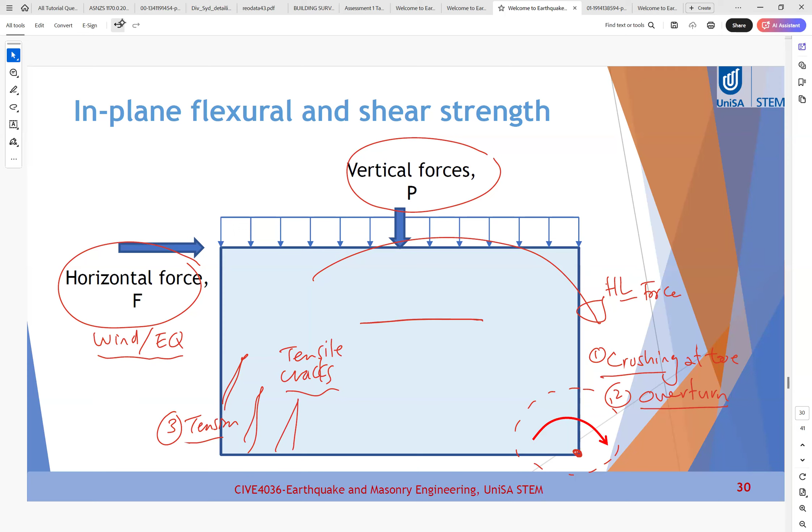This force also can cause sliding shear here. So this is the force issue - these are the things we need to check when we design the unreinforced masonry wall for in-plane flexural or shear strength. Let's continue at the last step we reached last week.

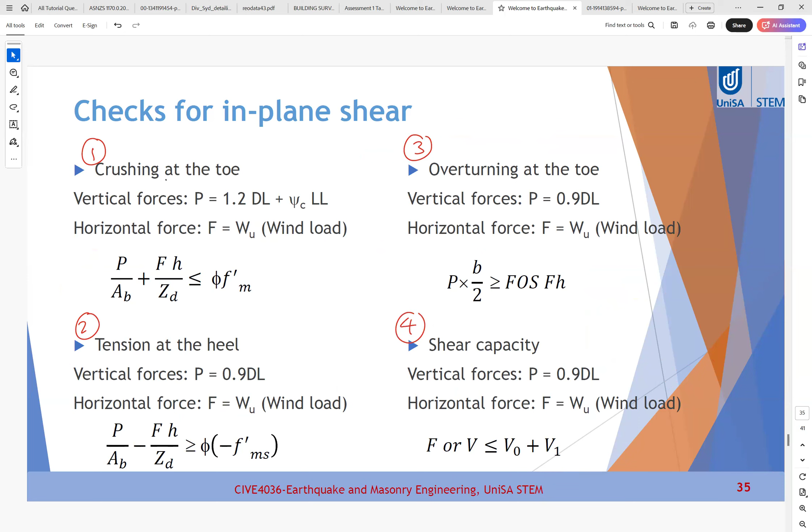This was a summary of the issues or checks needed, and today we will go through them in detail. Our first check is crushing at the toe. So when you have the horizontal force F here - from wind load or earthquake load - and P from vertical loads, gravitational load, dead load, and live load.

First, the load combination to check the wall for crushing: for vertical loads P, we have 1.2 dead load or G plus psi C Q. For the horizontal force combination F, it is directly the wind load, because the wind load is already an ultimate load, so it's already factored.

Again, the problem is we may have crushing due to compression on this side of the wall due to the applied moment from horizontal force. The formula we use is P, the vertical force, over AB, the bedding area of the masonry element, plus F, the horizontal load, times H. H is the lever arm, or the height of the wall.

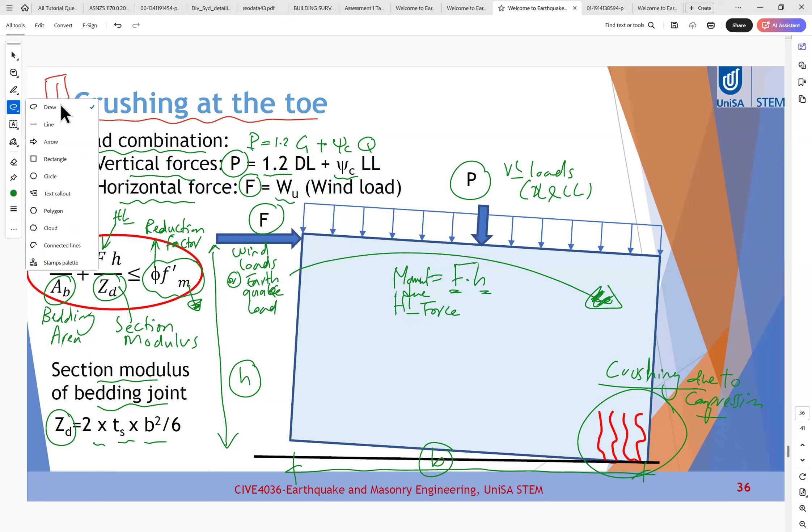So what we need to know here is the load combination and the formula. The load combination: 1.2 dead load plus psi c live load for vertical forces, and for horizontal forces we have the wind load or earthquake load. The formula: P over AB plus F times H over Zd, the section modulus, should be less than or equal to phi Fm dash.

Our next check for unreinforced masonry wall is tension at the heel, also due to the moment on the wall. So we have F, H, and P here, and the moment will cause tension on this side of the wall, so we can also have cracks - this is tension at the heel.

For unreinforced masonry, because it is weak in tension, we need to be careful when designing this type of wall and check for any possibility of tension. The load combination for this case: for vertical load, only consider the stabilizing load, P equal to 0.9 G. For horizontal load, F equals W ultimate or E - earthquake or wind load - directly.

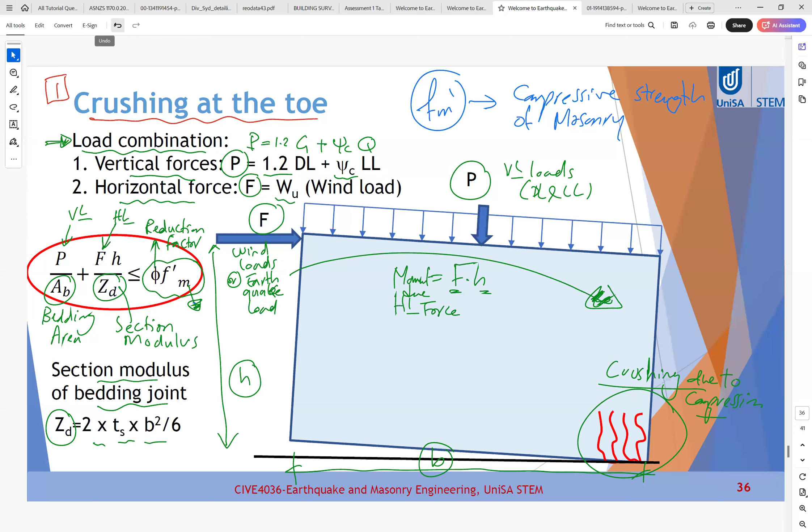Of masonry. Okay, so this is Fm dash, and here is FMS dash.

The third issue we need to check for unreinforced masonry walls under in-plane loading. So we have the overturning at the toe here at this point. So due to the force, the horizontal force and the lever arm h, so we will have a moment applied here, M equal to F H.

This moment may cause our unreinforced masonry wall to overturn like that.

Okay, so this is our F. So we need to check that our wall is stable against this overturning.

So the load combination in this case, we have for vertical forces P equal to 0.9 dead load or 0.9 G. For the horizontal force F, again, it is F equal to WU or the wind load.

So this is similar to the tension at heel. So in this case, the overturning moment is F times H. So this is our overturning moment.

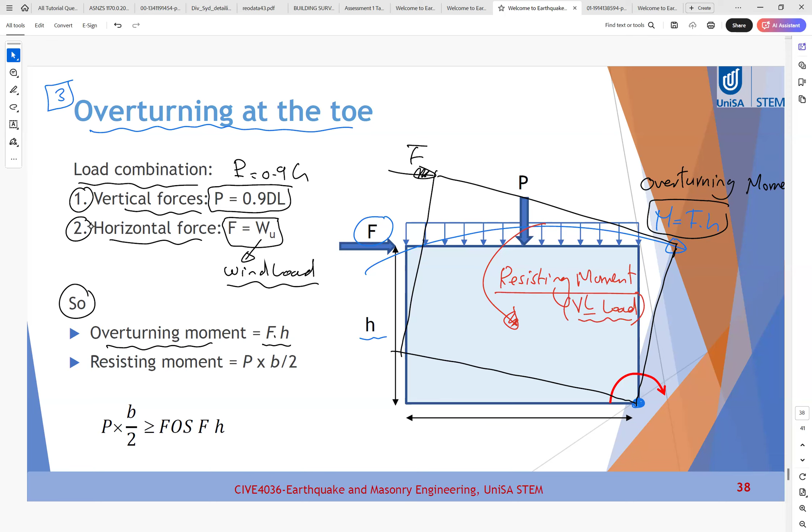Generated or produced by the vertical load. Okay, this moment will be, if this is our wall width.

So this force acting at a distance of B over 2 from this point. So our resisting moment will be the vertical force P times half of the wall width, which is B over 2.

Okay, so the resisting moment is P times B over 2, and the overturning moment is FH.

So our formula for stability, or our check formula, is the stabilizing moment or the resisting moment, P times B over 2, should be more than or equal to a factor of safety times the overturning moment FH.

So we have, this is our resisting moment.

And this is our overturning moment.

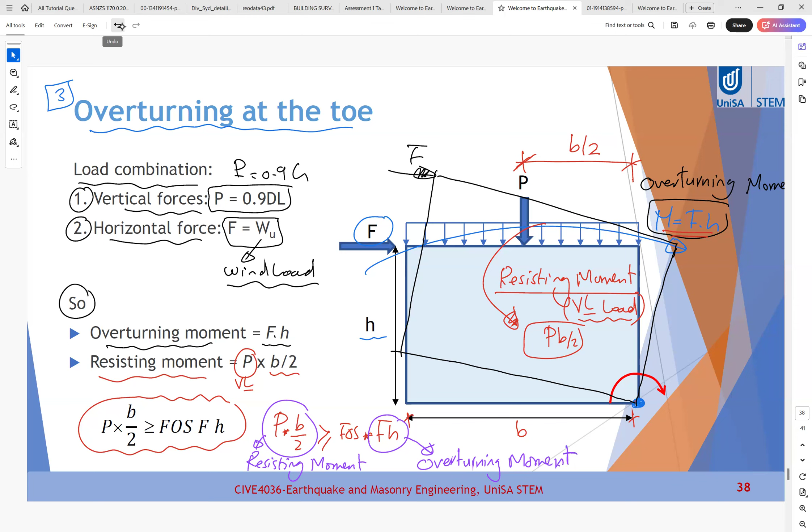Okay, so our check means that we need to confirm that the resisting moment is more than the overturning moment.

Our fourth check for these walls is shear capacity of the wall, in clause 7.5.4 in AS 3700, 2018 version. So we have two types of shear stress.

We have sliding shear failure, or sliding failure.

Okay, this is when we have something like shear stresses at this point. So the wall slides at this red surface, the sliding surface.

Okay, another type of shear failure is the diagonal shear failure. So diagonal shear failure is something like that. We have this crack. Okay, this crack can be within, as you know, we have some bricks.

So this can be within the bricks. Okay, so we have shear crack, diagonal shear crack, like that.

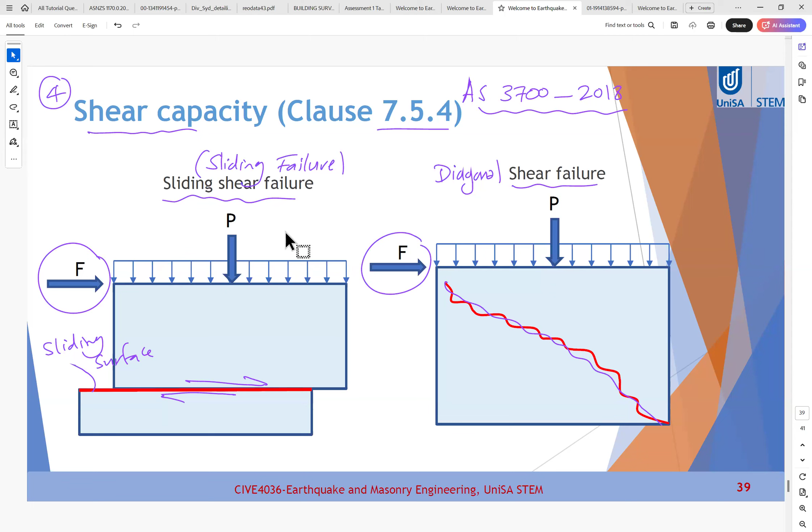So these are two types of shear failure due to the in-plane lateral force or in-plane lateral loads.

Okay, to check the horizontal shear forces, we have two types of shear forces, the horizontal shear force and the vertical shear force. So for horizontal shear forces, our formula is in clause 7.5.4.1.

The formula is V design should be less than or equal to two components, V naught plus V1. So the shear capacity of the wall comes from two components.

The first component is V naught, which is the shear bond strength of the section. The second component is V1, which is the shear friction strength of the section.

So the shear capacity comes from shear bond strength, the bond between the wall, the masonry, and the mortar, and so on. And the other is the friction, or shear friction.

Okay, so V naught equal to phi FMS dash AD. So this is our V naught value. And V1 value is KV times FD times AD. So phi is the...

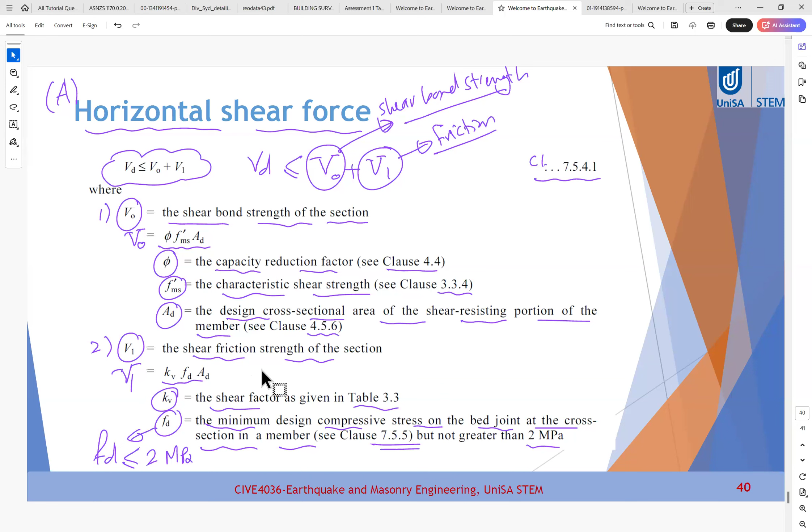Depending on clauses 4.4, 3.3.4, and 4.5.6, we can find V naught, the shear bond strength, or the shear friction, which equals KV FD AD. KV is the shear factor given in table 3.3. FD is the minimum design compressive stress on the bed joint at the cross section in a member from clause 7.5.5, but not greater than 2 MPa. So FD has a limit, should be less than or equal to 2 MPa. After you find these two components, VD should be less than these two components added together. So this is for the horizontal shear force.

For the vertical shear force, VD should be less than or equal to phi FMS dash times AD. As you can see, FD here is similar to V naught. So VD here should be compared to the same formula as V naught. We can say this value is V naught, or the shear bond strength of the member. VD's parameters are phi, the capacity reduction factor from clause 4.4, and FMS dash, the characteristic shear strength from clause 3.3.4. AD is the design cross-sectional area from clause 4.5.6. So it's a similar formula to the part of the horizontal shear force.

And that's it for the unreinforced masonry. Do you have any question, guys?

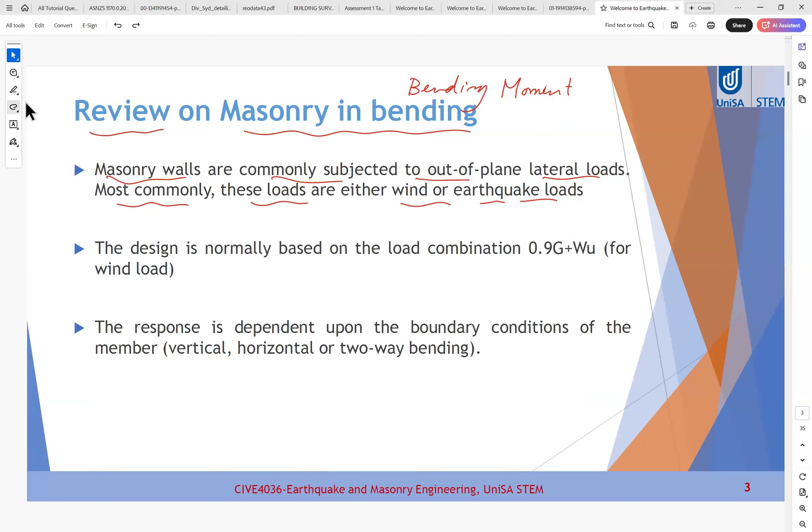Masonry walls are commonly subjected to out-of-plane lateral loads. Most commonly, these loads are either wind or earthquake loads. So if this is our wall, the wall is subjected to out-of-plane lateral load or lateral force from wind or earthquakes. The design is normally based on the load combination 0.9 G plus WU for wind load.

So our main load combination is 0.9 G plus WU, this for out of plane and in plane.

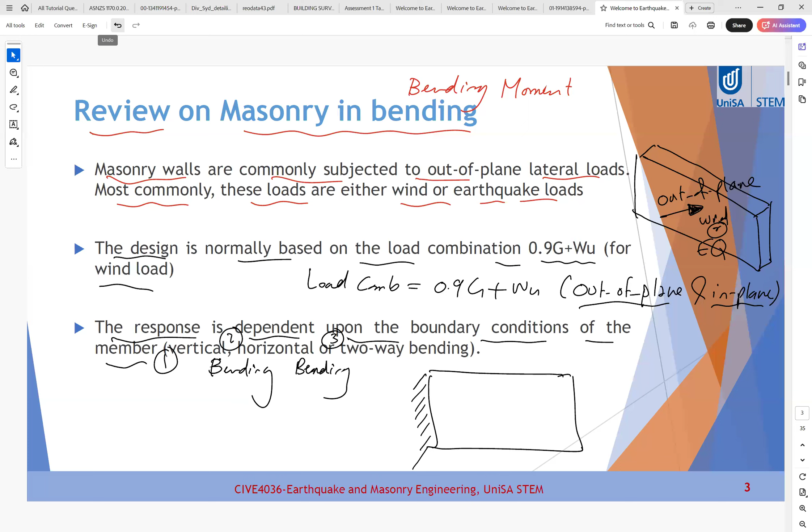The response is dependent upon the boundary condition of the member: vertical moment or vertical bending, horizontal bending, or two-way bending. So we have three types of bending, if you refer back to last week's lecture. Depending on the boundary condition of the wall, we might have boundary conditions on the vertical sides, and also boundary conditions for the horizontal or the top and bottom edges. So we have top edge, bottom edge, and vertical side, vertical side. Depending on the boundary conditions of these four edges, the behavior of the wall will be decided.

For example, we might have our first bending case as vertical bending for this type of wall. As you can see, we have the top edge restrained using this red boundary condition, and also the bottom edge is restrained - bottom edge restrained as well. This means that the sides are free and free here. So what happened to the wall? This wall bent in the vertical direction like that.

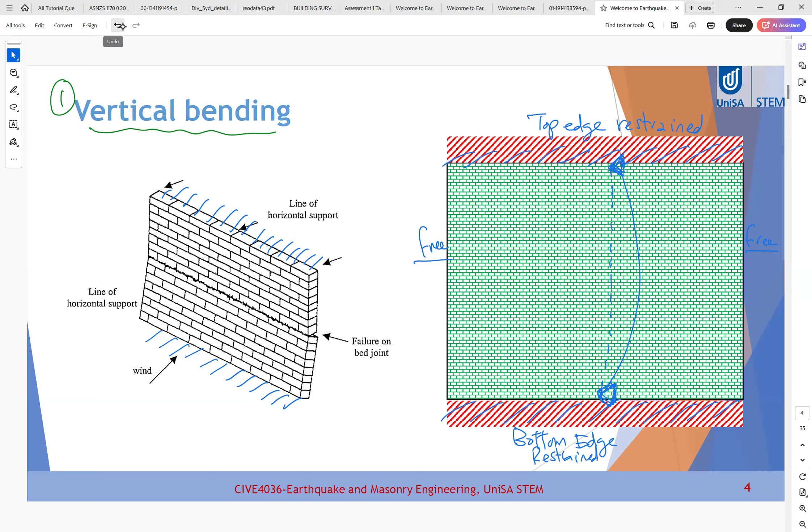So this is our original wall. This one will bend like that because we have support at the top and support at the bottom. If we look at this one here, we have support at the top here, support at the bottom line here. So the wall bends in this direction like that, causing cracks in this joint here in the middle, because this is the point of maximum bending. And the failure here happens on the bed joint.

So this is called vertical bending of the masonry walls.

The second bending behavior is horizontal bending, which is quite similar but in the other direction. If we have a wall like this, it's restrained at only the two vertical sides, so we have vertical restraint here and vertical restraint here, with no restraint at the top or bottom. In this case, the wall will bend in the horizontal direction because we have a support here and a support here, so the bending will be in this direction, and the cracks will happen like that.

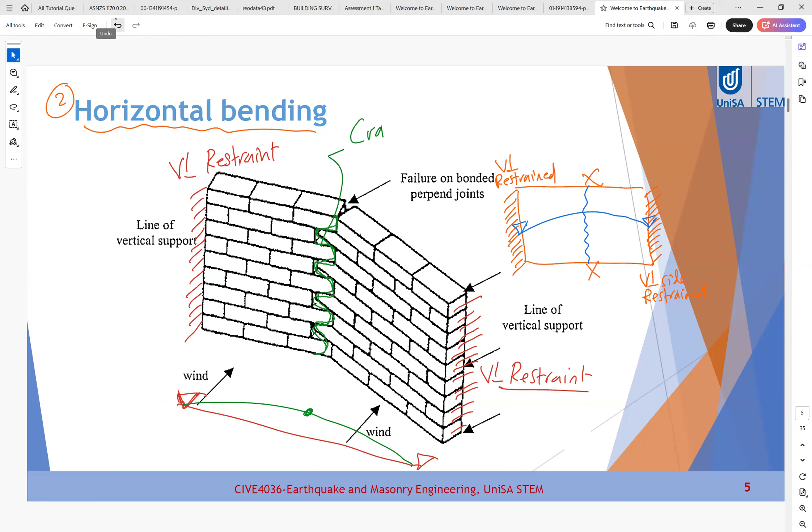So if we look here, we have a line of support here, vertical restraint, and another line of support here, vertical restraint. So this is our system, and our bending will be something like that. The maximum moment here, so as you can see, the cracks happen like that. So this is our crack or failure at the perpend joints, which are the vertical joints of the wall.

This is just a reminder of the one-way horizontal bending. The horizontal bending may fail either through the mortar joints, or partly through the joints and partly through the masonry units. So as you can see here, this failure line can happen in the masonry unit itself, or part in the masonry unit and part in the joint.

All perpends must be completely filled. The wall must comprise a minimum of four continuous courses of masonry acting together in horizontal bending. So each line is one course: 1, 2, 3, 4. So this is the requirement.

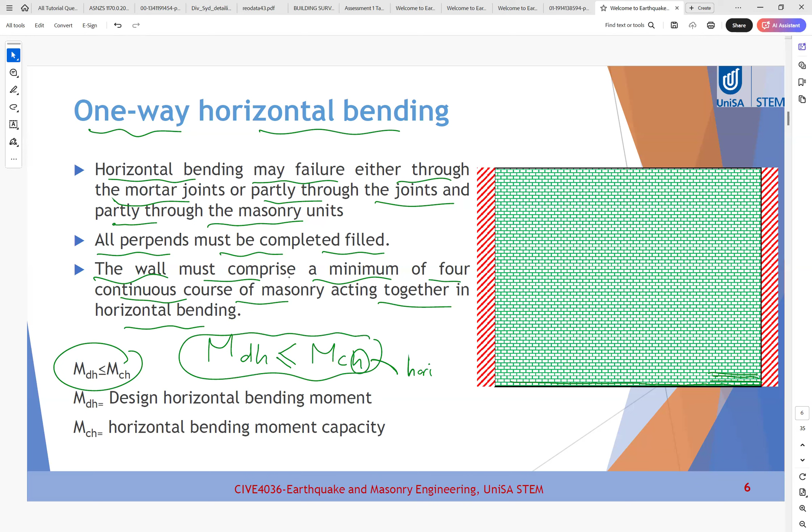The design formula is MDH should be less than or equal to MCH. H is for horizontal bending. MD is the design moment, so the design horizontal bending moment, and MC is the moment capacity. So similar to any design formula, the design moment should be less than or equal to the capacity.

Thank you, Hassan, for the question. The column is a vertical restraint only if there is a connection between the column and the wall. They need to embed some connection between the column and the wall. But if it is just attached to it without any embedded connection, it is not considered a vertical restraint because it will be too weak.

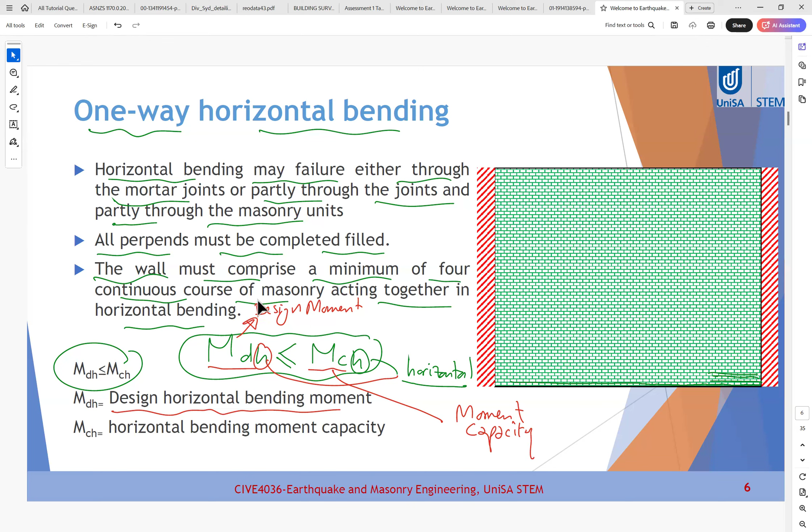So this was just a revision of what we have done last week for the one-way horizontal bending and one-way vertical bending. The third type of bending behavior is the design for two-way bending.

The actual crack pattern is similar to slabs or concrete slab. It depends on the support or restraint condition on each side of the wall panel. We have four sides: top, bottom, and vertical side left and right. For two-way bending, you might at least have one restraint at the bottom and one restraint at one of the vertical sides, so one horizontal restraint and one vertical restraint.

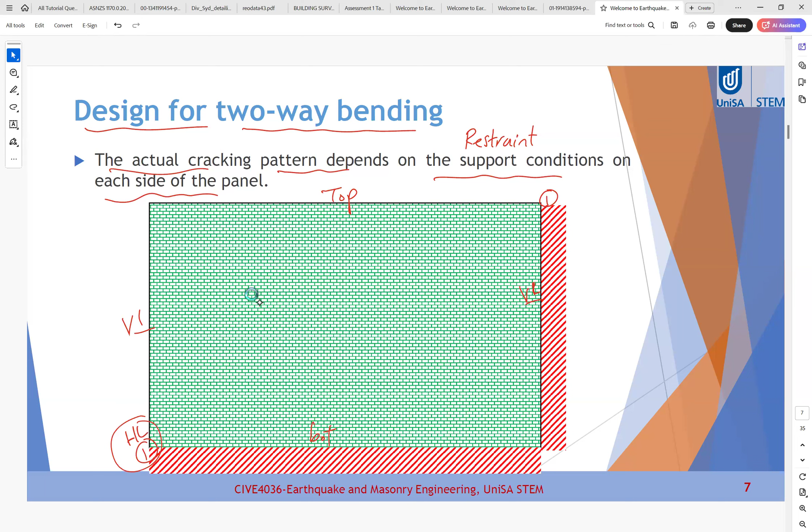So as you can see here, this is an example of two-way bending. In this case, this side of the wall is supported by another wall, so we have a line here. We have also a support at the bottom side of the wall, and a line of support at the top of the wall. So only the right vertical side doesn't have restraint.

So as you can see, we might have a crack line or fold here at 45 degrees, for example, and also here, because we have two lines of support, these will intersect at this point. Then the crack will continue like that until it reaches the free point, because there is no support here, so it will end there. So this is the crack shape, quite similar to the cracking lines for slabs, depending on how much support there is.

So for example, if you have four supports like that, we will have 45 degrees, 45 degrees, and here 45 degrees, 45 degrees. So this will be our cracking or two-way bending behavior of the wall.

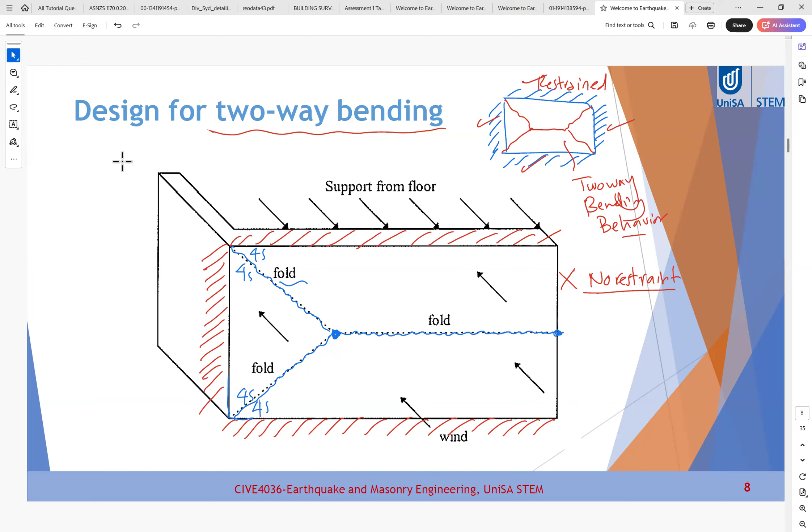If you have four restraint conditions - this is a reminder from last week's lecture. Briefly, the design steps for two-way bending are: the wall is designed as a rectangular panel with lateral support at least along its base and one of its vertical edges. So we need to design the wall to act in two-way bending behavior. It should at least have its bottom side restrained and one of the vertical sides restrained - restraint here, no restraint here, no restraint here.

This is the minimum. The wall is of a single leaf or solid construction, or of cavity wall construction, with each leaf of the cavity wall being a single leaf or solid construction. So we might have a single leaf wall - this is the cross section. Or we might have a space here and two leaves, for example. So this is single leaf, and this is cavity wall.

The requirements for robustness are satisfied for this type of masonry wall. The construction and detailing of the wall are such that the requirements of clauses 7.4.2 and 7.4.3 are satisfied. So all these are some conditions for the design of two-way bending.

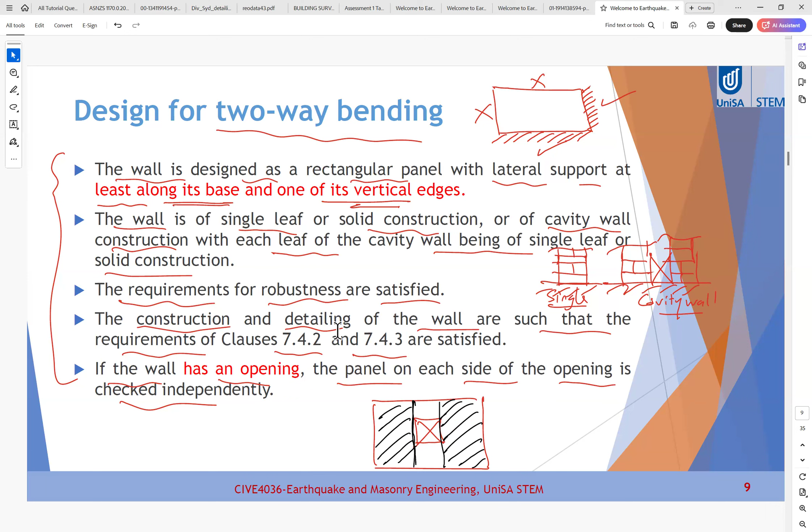So this was all a reminder or revision of what we covered last week. And now we can start the introduction to reinforced masonry.

The general requirements for reinforced masonry are that reinforced masonry is designed for four types of straining action: design of member in compression, number one; design of reinforced masonry member in bending, number two; design of members for in-plane shear, number three; design of member for out-of-plane shear, number four. So the reinforced masonry wall needs to be designed for four straining actions: compression, bending, in-plane shear, and out-of-plane shear.

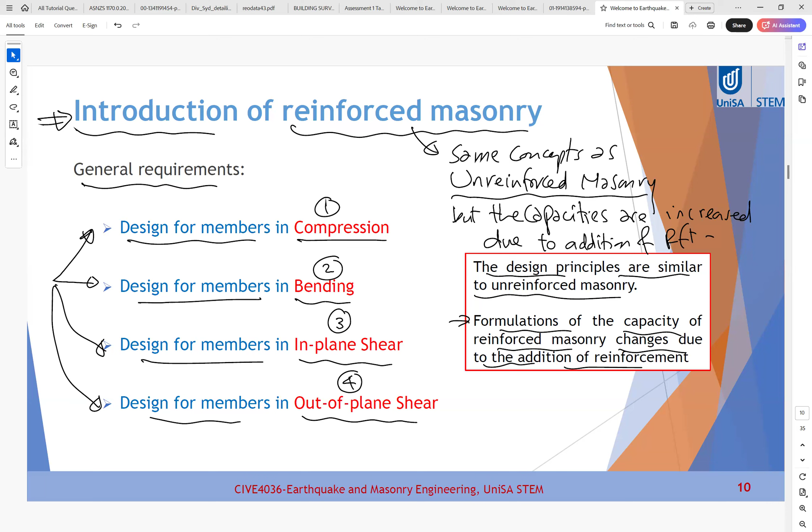The design principles are similar to unreinforced masonry, but the formulation of the capacity of the reinforced masonry increases due to addition of reinforcement. So the main idea is the same concept as unreinforced masonry, but the capacity is increased due to reinforcement. This is logical because we are adding reinforcement to enhance the behavior of the unreinforced masonry. So let's see what reinforced masonry is, or how we can reinforce the masonry wall to become a reinforced masonry wall.

This could be obtained by reinforcing the masonry wall with cores of blocks - within the core of blocks we have vertical bars. This is our first step. Then around the bars, we fill it with grout. So this is how we reinforce masonry walls - we add some bars with spacing between these bars, then the vertical bars are surrounded with grout to be fixed in place.

So now this wall becomes reinforced with vertical reinforcement first, as you can see in this figure. We add, for example, bar here, bar here, bar here, then fill around the bar with some grout, some grout, some grout. The spacing between bars is the bar spacing. So this is the first reinforcement, vertical reinforcement.

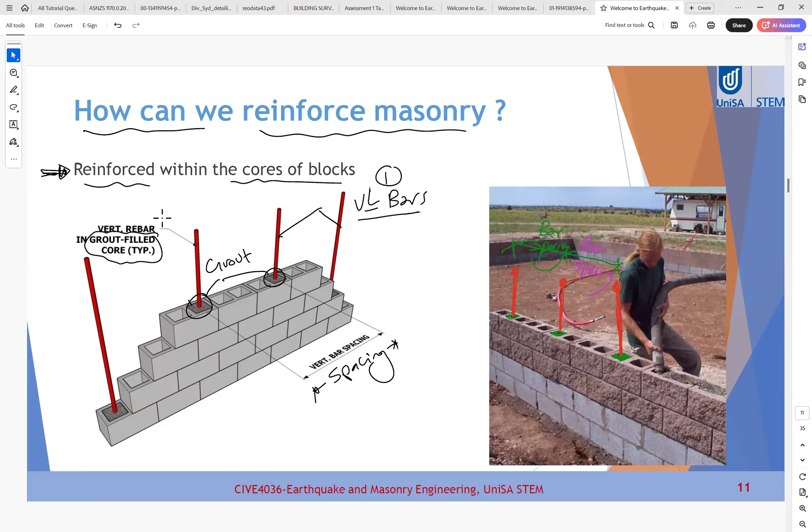We will also have reinforcement in the bed, or in the mortar bed or mortar course - in other words, horizontal reinforcement. So how can we reinforce the masonry wall? Using two types of reinforcement: one is vertical reinforcement, and second is horizontal reinforcement.

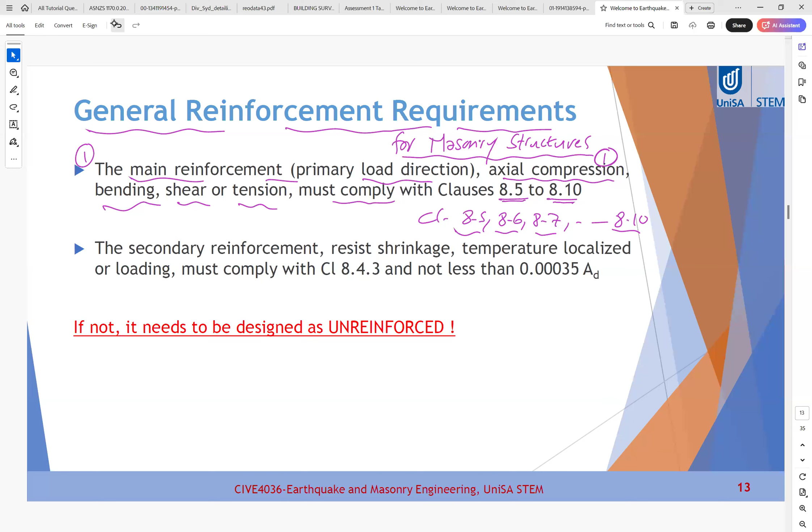There are some general reinforcement requirements for masonry structures. The first is the main reinforcement for primary load direction - axial compression, bending, shear, and tension must comply with clauses 8.5 to 8.10. So any main reinforcement of the reinforced masonry wall should comply with clauses 8.5, 8.6, 8.7 up to 8.10 for all design actions, which are axial compression, bending, shear, or tension. So you need to check this reinforcement against all these clauses.

The secondary reinforcement, which resists shrinkage, temperature, localized effects, or loading, must comply with clause 8.4.3 and must not be less than 0.00035 AD. So the secondary reinforcement needs to be checked against clause 8.4.3, and the secondary reinforcement should be more than or equal to 0.00035 times the design area of the reinforced masonry member.

And the use of secondary reinforcement to resist shrinkage, temperature localized issue, or temperature loading. So these are the benefits of using secondary reinforcement, if these two conditions, A and B, are satisfied.

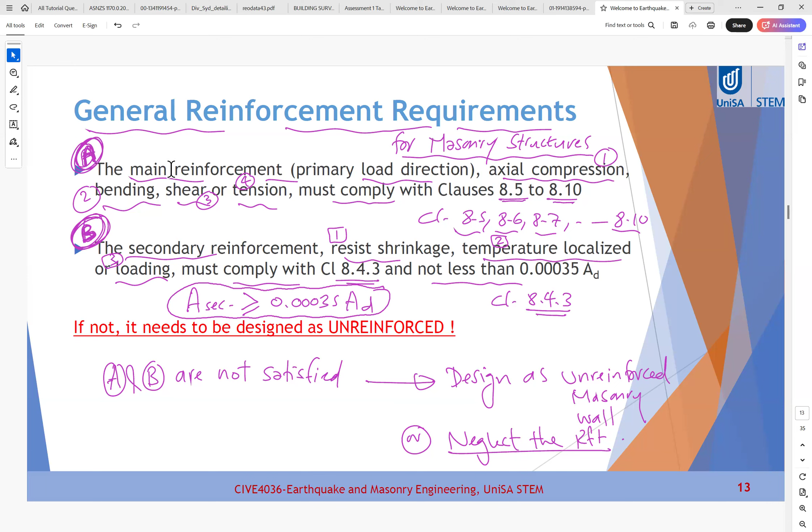If these two conditions, A and B, are not satisfied, design the wall as an unreinforced masonry wall. In other words, neglect the reinforcement inside, meaning the added reinforcement can be ignored.

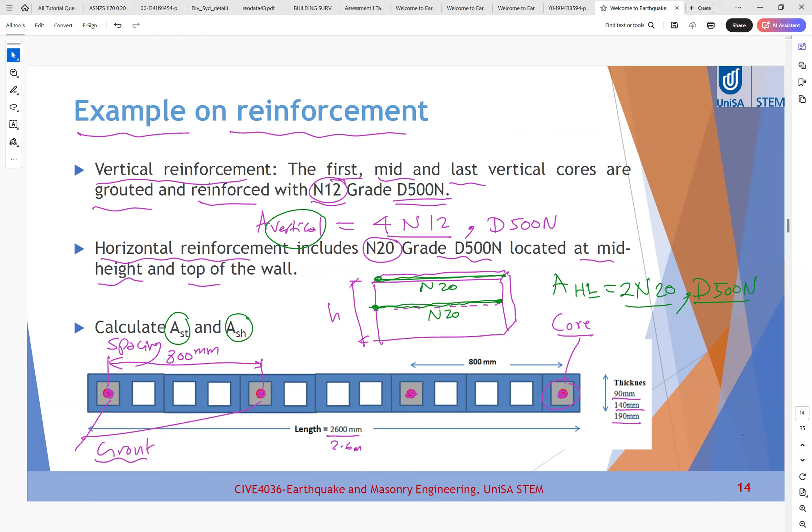The first one is vertical, 4N12, and the horizontal reinforcement is 2N20, both with the same grade, D500N. The requirement is simple: just know how to calculate area S vertical and area S horizontal. So vertical reinforcement, as we know, 4N12, so 1, 2, 3, 4 bars, each N12, with spacing of 800 millimeter.

So the total area of the vertical reinforcement will be the area of 4 bars, so it's 4 times pi R squared. Each bar is a circle, so it has a diameter and also a radius R. Area of a circle equals pi R squared if using the radius, or pi D squared over 4 if using the diameter. For N12, the radius is 6 millimeter, so pi times 4 times 6 squared gives us an area of 452.4.

For horizontal reinforcement, similar, we have 2 bars in N20. So if this is our wall, we have 1 bar at the mid height here in N20 and 1 bar at the top in N20, so total is 2N20. So area horizontal is again 2 times pi R squared. The diameter here is N20, so the radius is half, which is 10 millimeter. So the total area of the horizontal reinforcement is 628.3.

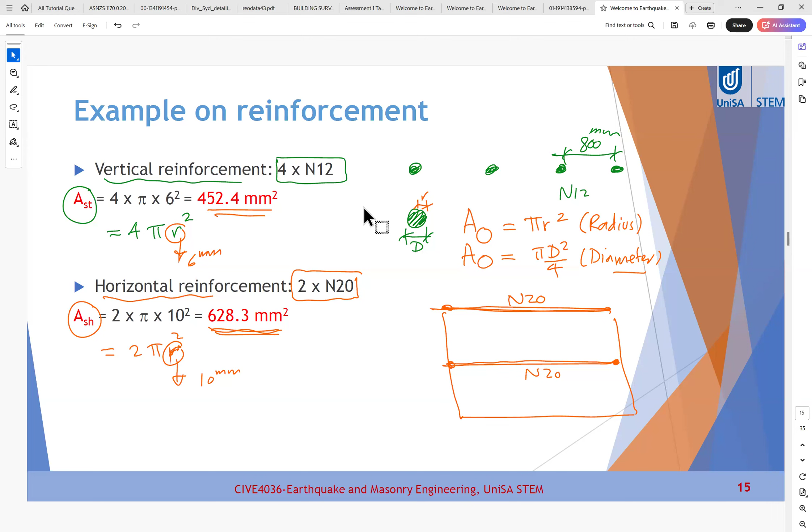Then our first formula or our first design action is the design of a reinforced masonry member in compression according to... okay, no worries, Harrison.

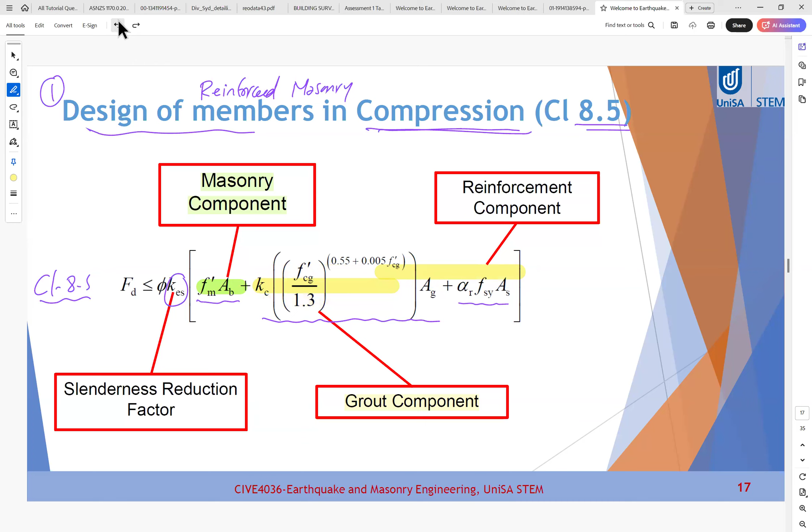The third component, which is for the reinforcement component, is alpha R Fs yield As. So this is our third component. And Kes is the slenderness reduction factor for the wall.

So these are the parameters of the design of reinforced masonry walls in compression. We have a contribution of three elements in the compression. The first contribution is from the masonry component itself and from the reinforcement embedded inside, and due to the grout surrounding the vertical bars.

So these are the slenderness reduction factors - sorry, these are the equations for reinforced masonry in compression. And let's have a look in the standard about that. Let's have a quick look.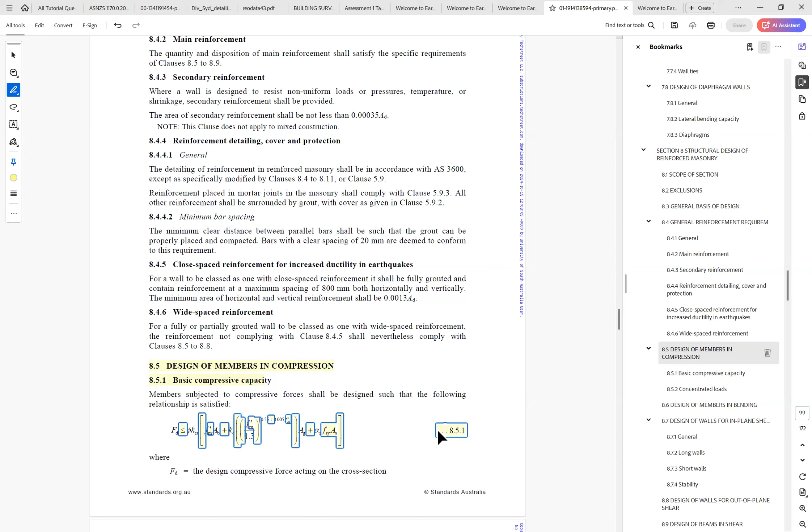So here, as you can see, this is the design of member in compression here. Clause 8.1 and 8.5, sorry. So 8.5.1 is the basic compressive capacity, according to clause 8.5.1, as follows.

So this is the formula. The design parameters of this formula are, as you can see: FD is the design compressive force acting on the cross section. Phi is the capacity reduction factor. KES is a reduction factor to account for the eccentricity in loading and slenderness of the member in design of reinforced masonry, and KES is given using this formula here.

SR is the slenderness ratio. E is the effective eccentricity. Fm' is the characteristic compressive strength of the masonry. AB is the bedded area of the masonry cross section. Kc is a strength factor for grout in compression, 1.4 or 1.2 based on masonry type.

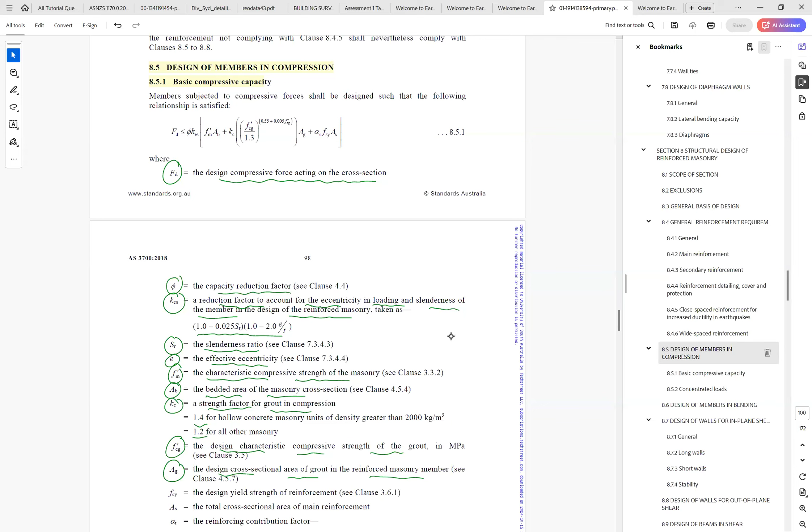Fcg' is the design characteristic compressive strength of the grout in MPa. AG is area of grout, the design cross sectional area of the grout in reinforced masonry member. Fs yield is the design yield strength of reinforcement. As is the total cross sectional area of the main reinforcement. Alpha R is the reinforcing contribution factor: 1 for piers, 0.4 for walls, 0 for concentrated loads.

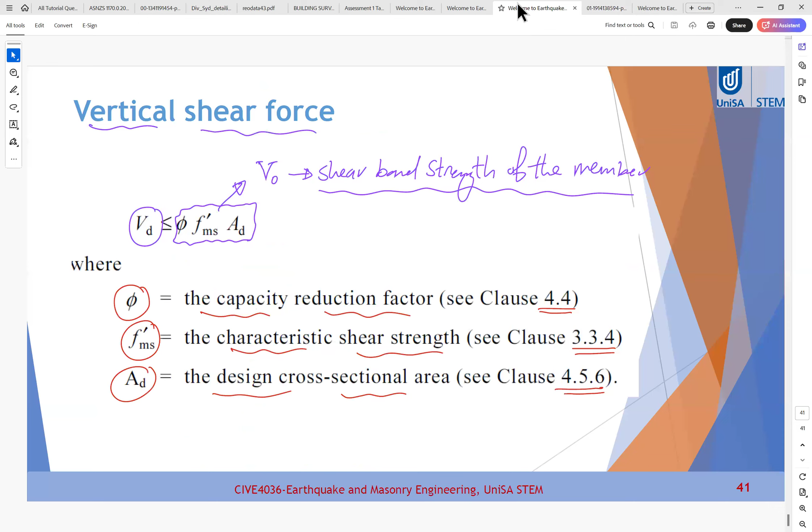So these are a brief introduction of the formula we are using for compression design, and the parameters are defined clearly in the standard. Calculation of the slenderness ratio SR is identical to that required for the refined calculation procedure in 7.3.4.3. So SR will be according to clause

7.3.4.3. The reduction factor KES is equal to 1 minus 0.025 times SR, multiplied by 1 minus 2 times E over T. So this is our reduction factor KES. For conservative design, the eccentricity shall be taken as 0.05 times the thickness of the wall.

The reinforcement area As should be more than or equal to 0.002 times the design area of the wall. So this is just a few examples of the parameters needed. For the detailed calculation, we need to refer back to section 8.5 in the Australian Standard 3700.

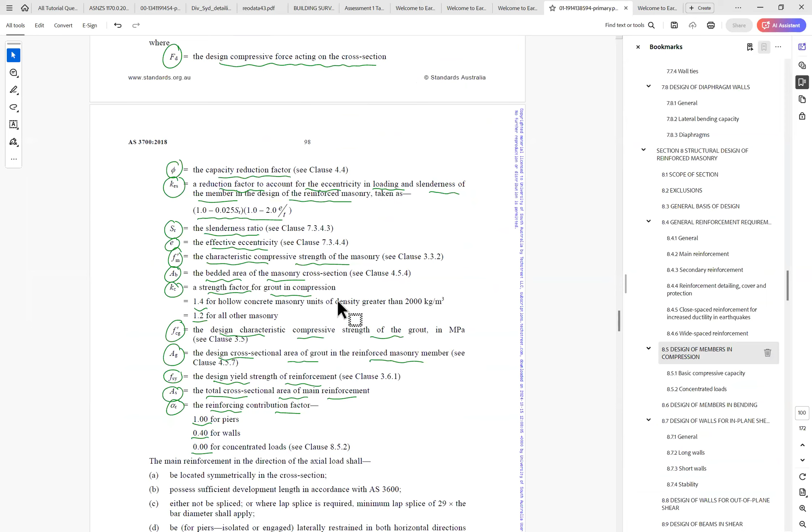Okay, so this is the main parameters we have. And this is how to find the slenderness ratio SR according to clause 7.3.4.3, for a wall that is laterally supported along one or both of its vertical edges and subject to design compressive force FD less than 0.2 F0. SR will be the lesser of these two values.

So if we have a wall that is supported on one or two vertical sides and the bottom side, so the top side may be restrained or not restrained, SR will be using the lesser of these two formulas. SR equals AV times H over KT times T. H is the wall height and T is the wall thickness.

Or 0.7 over T times AV H AHL. So H and L are the wall height, wall length, and T is the wall thickness.

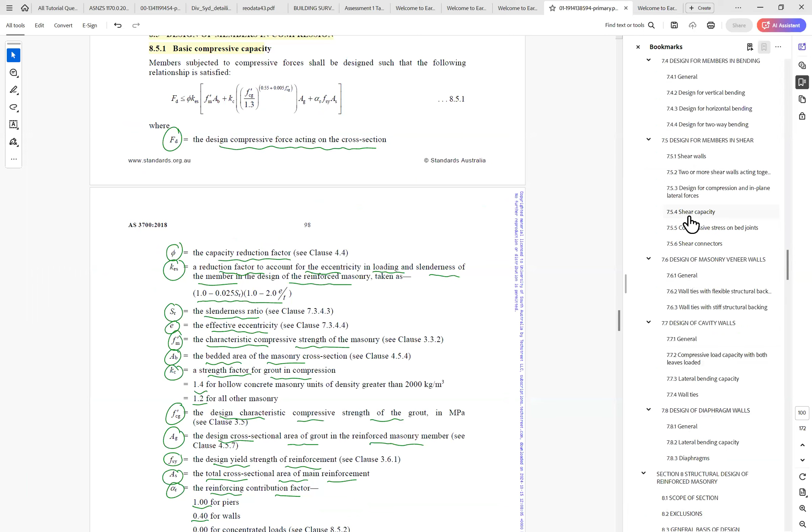So what is AV and AH? If we go to the standard again to find clause 7.3.4.3, here is design using refined calculation.

So if we scroll down until reaching the slenderness ratio, here as you can see is our slenderness ratio. The slenderness ratio of a member about a given principal axis shall be as follows: for a wall laterally supported along one or both of its vertical edges and subjected to design compressive force, the SR will be the lesser of these two.

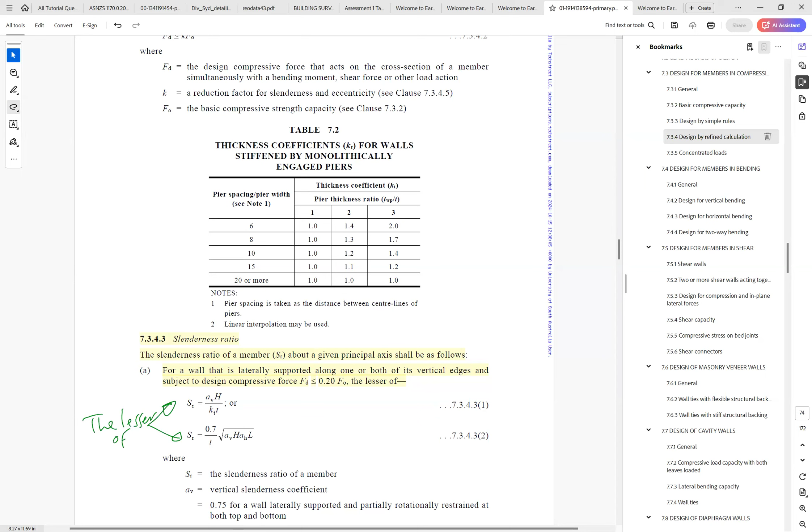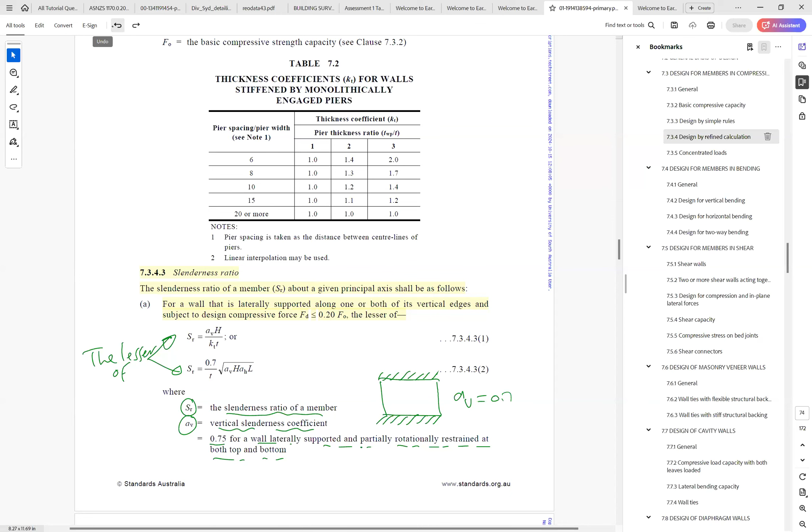Okay, where SR is the slenderness of the member, AV is a vertical slenderness coefficient equal to 0.75 for wall laterally supported and partially rotationally restrained at both top and bottom. So if you have a wall restrained at top and bottom end, AV shall be taken as 0.75. For wall laterally supported at top and bottom, and partially restrained at one of them, it's 0.85.

One for wall laterally supported at top and bottom. So depending on whether it is partially or totally supported laterally, AV can be 0.75, 0.85, 1, 1.5, or 2.5.

So for a freestanding wall, it's 2.5. H is the wall height, the clear height of the wall between horizontal lateral supports. KT is a thickness coefficient derived from table 7.2. T is the overall thickness of the wall cross section perpendicular to the principal axis.

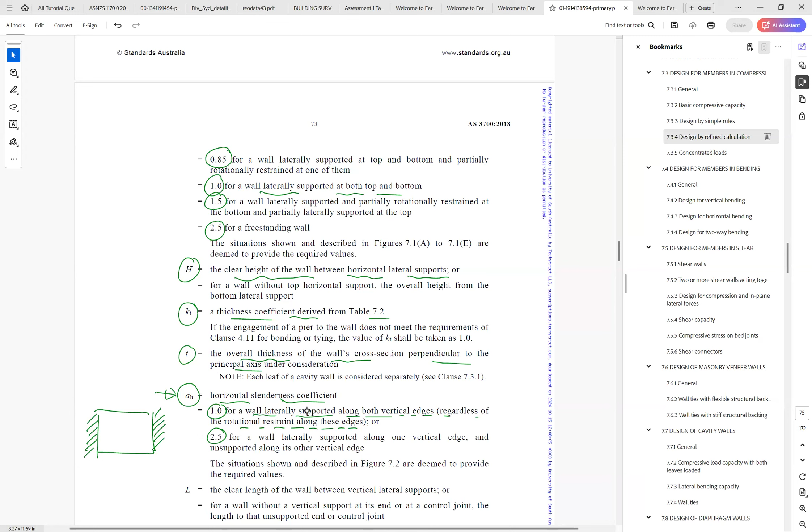AH is similar to AV. AH is the horizontal slenderness coefficient. It depends on the vertical edge's restraint, so it can be 1 or 2.5. 1 for a wall laterally supported along both edges regardless of the rotational restraint along those edges, or 2.5 for a wall laterally supported along only one vertical edge.

So for this case, AH equals 1. The other option is only one end, so AH will be 2.5. L is the clear length of the wall between the vertical supports. So those are the parameters of the slenderness ratio calculation according to clause 7.3.4.3.

The second case: if we have openings, where the openings in a wall are such that the masonry between any two consecutive openings is by definition an isolated pier, the slenderness ratio of that isolated pier shall be taken as SR equals 2 times H1 over T, where H1 is the taller opening height. For all other cases, SR equals AV times H over KT times T.

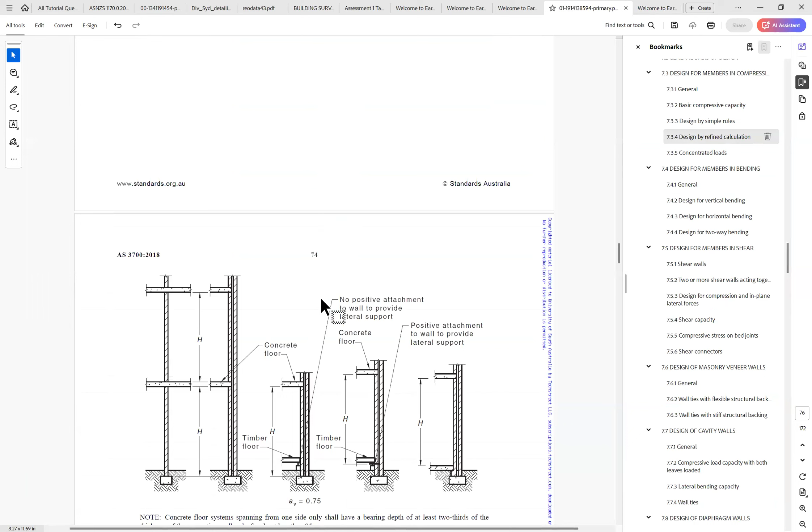Okay, so if we return back to the standard: where openings in a wall are such that the masonry between any two consecutive openings is by definition an isolated pier, the slenderness ratio of that isolated pier should be taken as the lesser of the following: number one, SR equals 2H1 over T, or the value of the pier assessed in accordance with this clause.

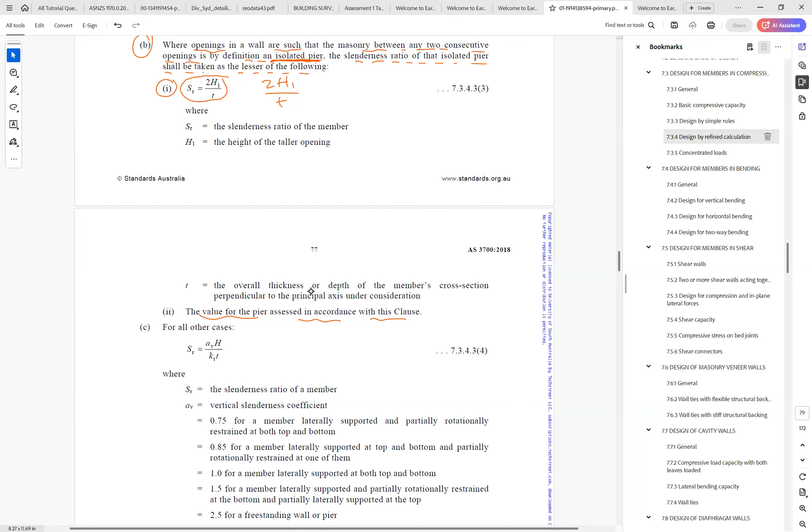So we will focus on this one, similar to the slide, where SR is the slenderness ratio, H1 is the height of the taller opening, T is the overall thickness or depth of the member perpendicular to the principal axis under consideration.

So where openings in a wall are such that the masonry between any two consecutive openings is by definition an isolated pier - if we have a wall with two openings, this is our pier. So this now becomes called a pier. The slenderness ratio of that isolated pier, the green isolated pier, will be 2H1 over T.

Okay, 2 is okay. H1 is the height of the taller opening. So if we assume this is, for example, 2 meters, this 2.5 meters, so this is our H1, H1 is 2.5 meters. T is the overall thickness of the wall - so this is our T. Okay, so this is just a brief explanation of what is meant here for the slenderness ratio.

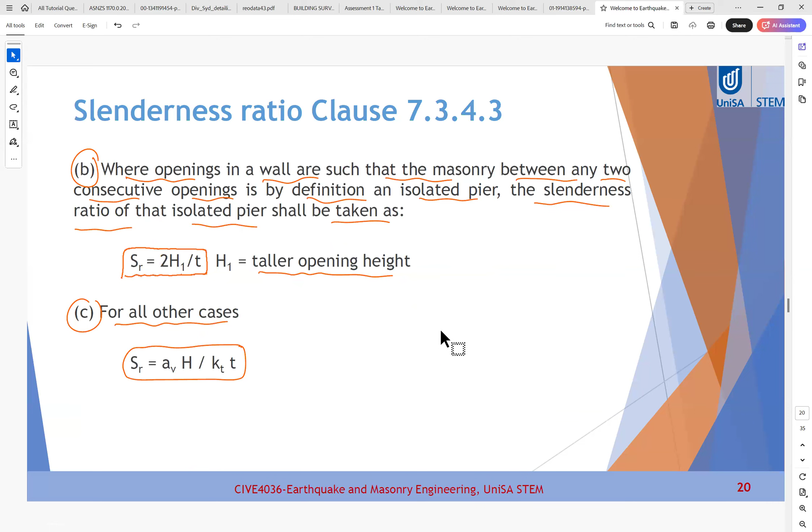For all other cases, this is the formula. Then the second design action we have today is design of masonry - reinforced masonry members in bending. The bending is according to clause 8, section 8.6.

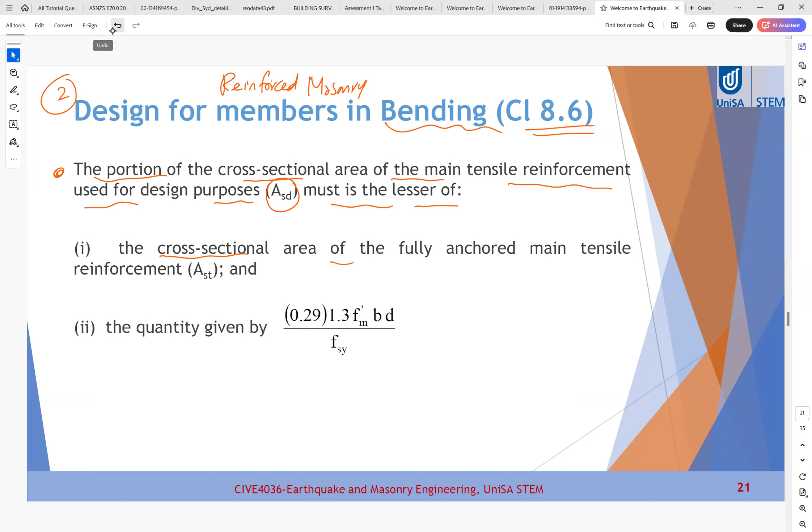So the portion of the cross-section area of the main tensile reinforcement used for design purposes, ASD, must be the lesser of the cross-sectional area of the fully anchored main tensile reinforcement, AST, or the quantity given by this value. So to design the member in bending, we have a value called ASD, which is the portion of reinforcement used for design of bending. This just means you may take the whole amount of steel embedded in the wall, or part of it. So ASD will be the lesser of two values.

These two values are the total area of steel, or the value 0.29 times 1.3 Fm dash B D over F yield. So this is the formula. Let's define some of the parameters.

So area ST is already the area of steel, and here we have Fm dash, which we know earlier is the minimum compressive strength, B and D are the properties of the wall. So Fm dash again is the compressive strength of masonry. B is the wall member width. D is the effective depth of the steel reinforcement. So what we don't know is the grade of steel.

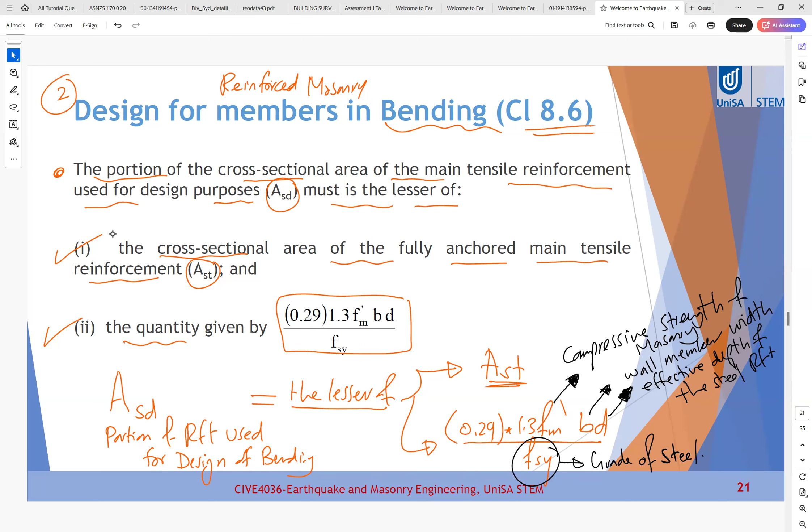The grade of steel will be found using a table, or the design yield strength of steel or grade of steel will be from table 3.7, strength and ductility of reinforcement. So we may have these types of reinforcement: bar plain, bar deformed, welded mesh, stainless steel plain, stainless steel ribbed bar.

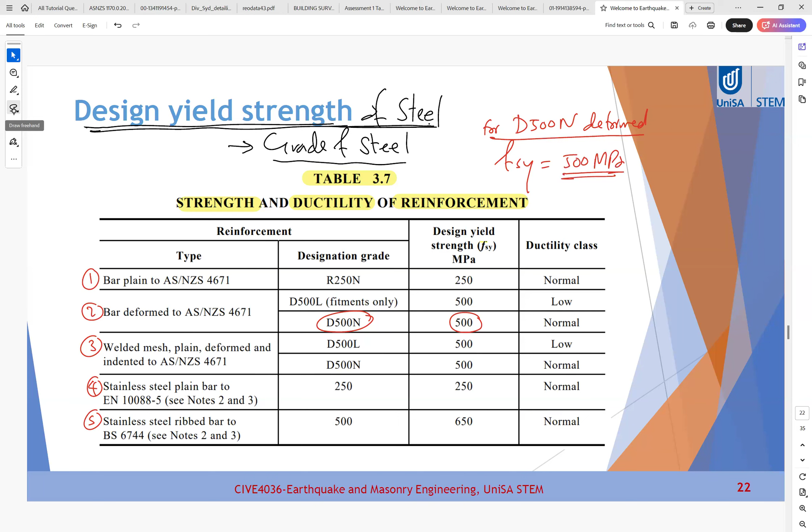So for example, the example given to us earlier was D500N. So how much is the design yield strength? 500. So for D500N deformed bar, its yield equals 500 MPa. Okay, so this is for the steel grade, and this is another step of the example we had earlier.

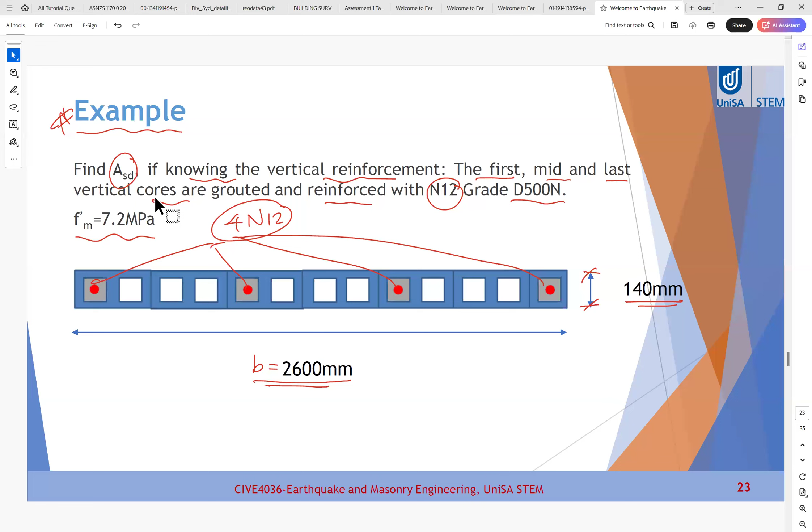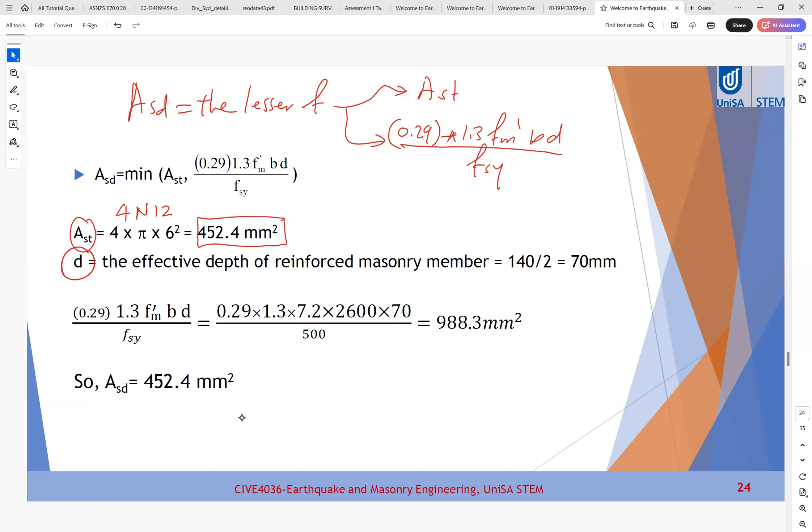So let's find how much is ASD. As you know, ASD is the lesser of AST and 0.29 times 1.3 Fm' times B times D divided by Fs yield. So, as you know, we found AST earlier, it was 452 for 4N12. Well, D, the effective depth of the reinforced masonry member, is 140 over 2, equal to 70 millimeter. How can we find that?

So this is our wall, this is our reinforcement. If this is our moment, out of plane moment, then D is the distance from the top fibers to the centroid or the CG of the steel bar. So this is our D. So D equals T over 2, because the total is T. T was given as 140 millimeter, over 2, so this is 70 millimeter, the effective depth of the reinforced masonry member.

So if we substitute, this one is 452.4 millimeter square. This is 0.29 times 1.3, Fm' was given as 7.2, B width of the wall 2600, D of the wall is 70, Fs yield is 500 because this is D in D500N. So this is 500. This gives us a value of 988.3 millimeter square. So our value should be this one here. So this should be our value. So ASD is 452.4 millimeter square. This is our answer, or our required answer for this question.

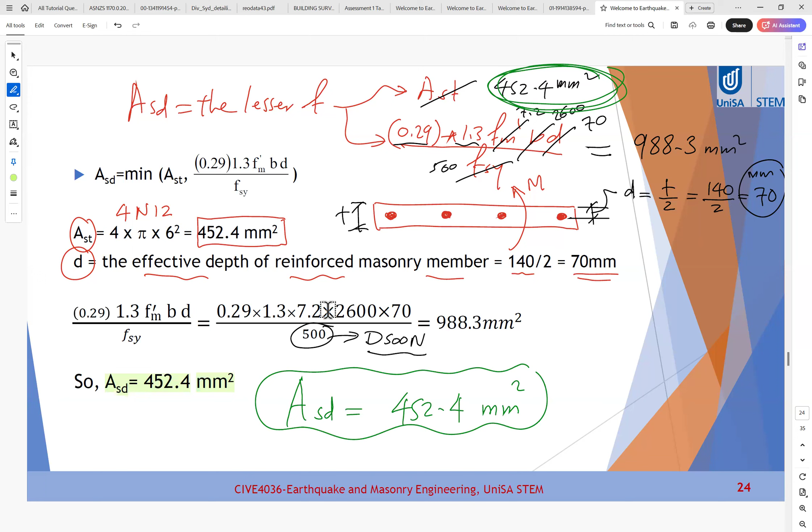So this is just a simple step on how to know how much is ASD. So let's refer back to the standard to see clause 8.6, or section 8.6, design of members in bending, as you can see.

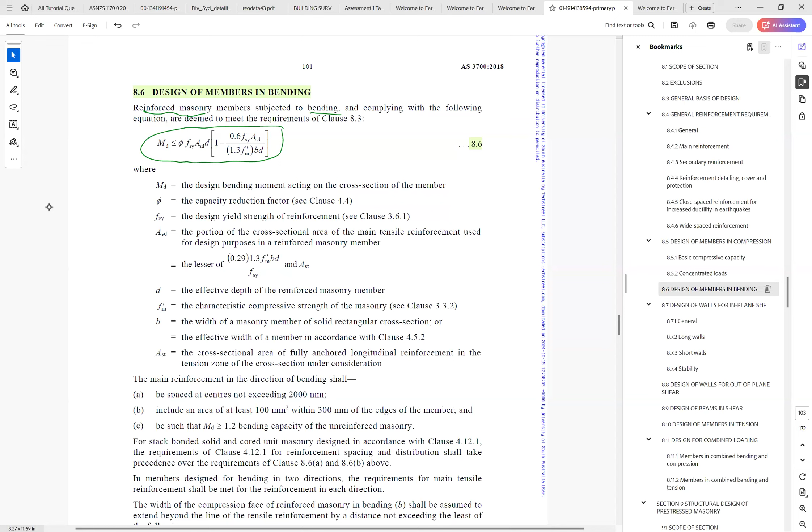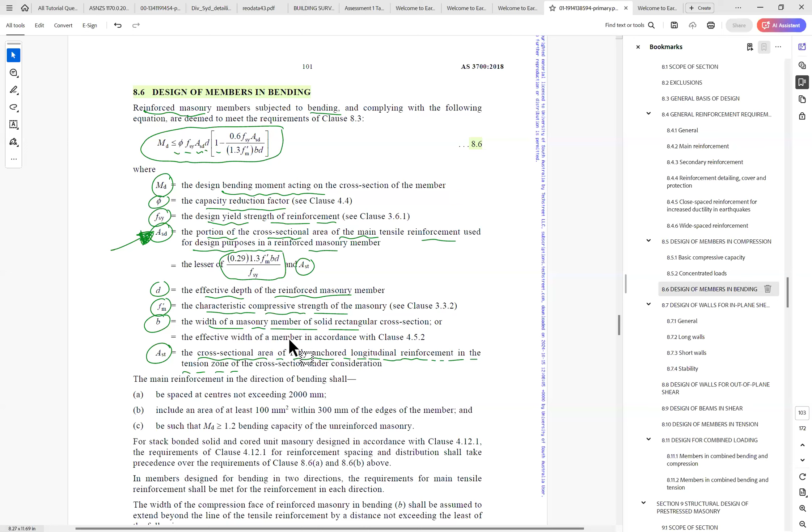So this is the formula, 8.6. The formula we will be using for bending of a reinforced masonry member: MD should be less than or equal to phi Fs yield ASD D times 1 minus 0.6 Fs yield ASD over 1.3 Fm' BD, where MD is the design bending moment, phi is the reduction capacity factor, Fs yield is the design yield strength of the reinforcement, ASD is the portion of the cross section, this being what we calculated earlier as the lesser of AST and the other value, where D is the effective depth, Fm' is the characteristic compressive strength, B is the width of the masonry member, AST is the cross-section area of fully anchored longitudinal reinforcement in the tension zone of the cross-section. So this is the formula we will be using to design for bending.

So, design of members in bending. The main reinforcement in the direction of bending must satisfy some instructions or conditions. First, it must be spaced at centers not exceeding 2000 millimeter, so the spacing between the bars cannot be more than 2000 millimeter. Second, bars must include an area of at least 100 millimeter squared within 300 millimeter of the edges of the member. And third, MD shall be more than 1.2 times the bending capacity of the unreinforced masonry. So we have 3 conditions for the reinforcement.

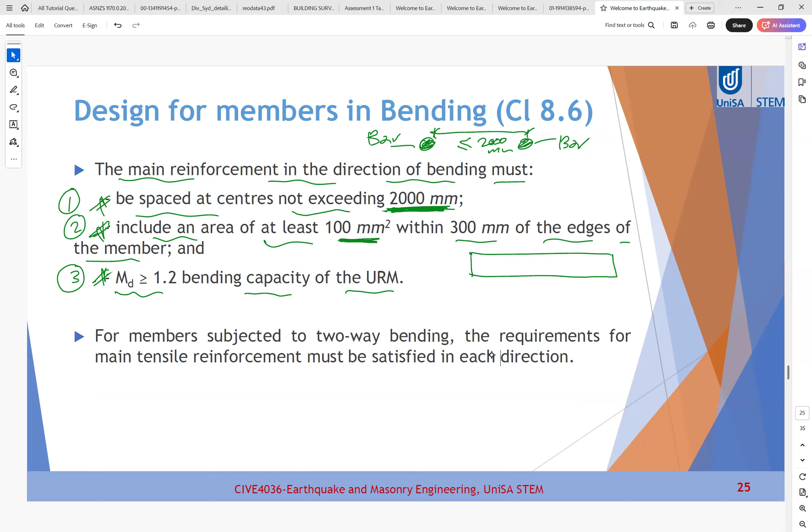We need to have spacing less than 2000. For the wall, at the first 300 millimeter of the wall, both edges, this green area, you need to have a reinforcement area of 100 millimeter squared.

The third is MD for reinforced masonry should be more than or equal to 1.2 times MD for URM, unreinforced masonry.

For members subjected to two-way bending, the requirement for the main tensile reinforcement must be satisfied in each direction. So if you have two-way bending, like this, you have two directions of bending, so you need to satisfy the condition in both directions.

So here, the design formula we have seen in the standard, clause 8.6. The design formula: MD should be less than or equal to phi, FS yield, ASD, D times 1 minus 0.6 FS yield, ASD divided by 1.3 FM dash BD.

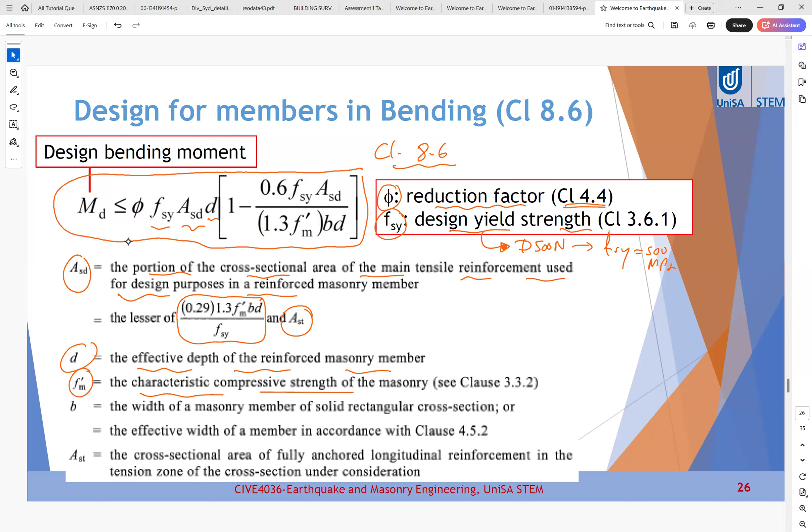Phi is the reduction factor according to clause 4.4. FS yield is the design strength of steel. For example, D500N, FS yield is 500 MPa. ASD is the portion of the cross-sectional area of the main tensile reinforcement used for design, which is the lesser of these two values. D is the effective depth of the reinforced masonry member, FM dash is the characteristic strength, B is the width of the masonry member, AST is the cross-section area of the fully anchored longitudinal reinforcement.

So this is the formula. We have gone through it earlier in the standard.

Number 3, design of reinforced masonry member in plane shear. So the third design action we have is in-plane shear, which is according to clause 8.7.

Clause 8.7: as mentioned, the design requirements are similar to what you learned in unreinforced masonry wall. So we will follow the same procedure as unreinforced masonry, but due to the addition of steel reinforcement, the capacity of the masonry wall will change, mainly increase due to the addition of reinforcement.

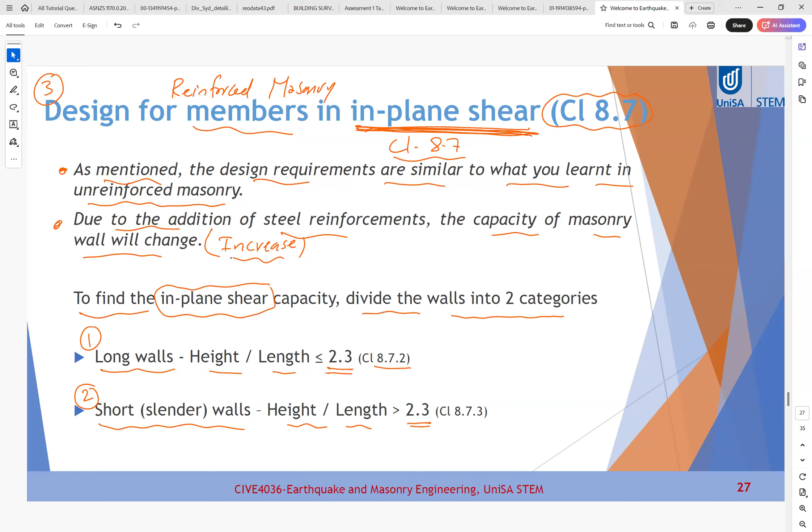To find in-plane shear capacity, walls are divided into two categories, category 1 and category 2. Category 1 is long walls, where height over length is less than 2.3 according to clause 8.7.2, or short walls, where height over length is more than 2.3. So these are long walls, and these are short walls.

So if this wall, this is our short wall, so this is L and this is H. Here for short wall, the height is bigger, height over length is more than 2.3, because the height is much bigger than the length or width of the wall. Here for long walls, we have this is L and this is H. So this is long wall.

So L here, H over L here is small because H is smaller here. So H over L is less than or equal to 2.3. So this is the classification of walls for in-plane shear, long and short walls.

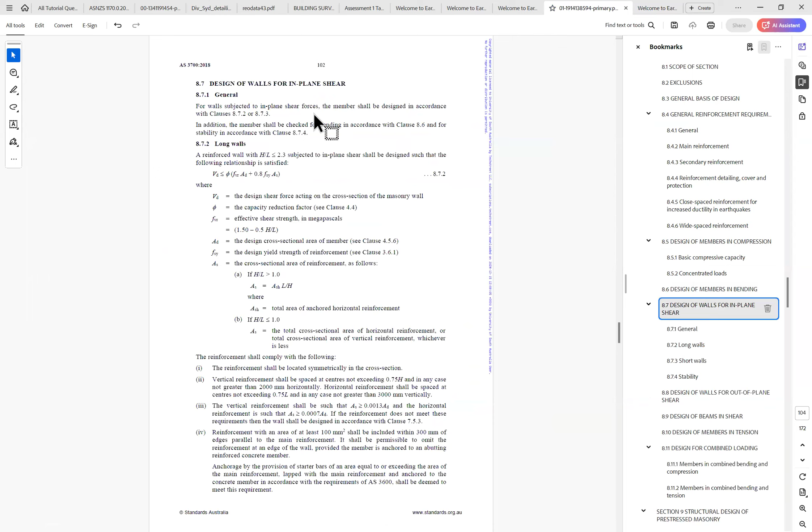Each type will have a different procedure. Let's have a look on clause 8.7 in the standard. So for 8.7, this is the clause. We have long walls and we have short walls.

For long walls, the condition is H over L less than or equal to 2.3. The design shear capacity is VD less than or equal to phi FVR AD plus 0.8 FS yield AS. For short reinforced wall, the condition is H over L more than 2.3, and the wall subject to in-plane shear shall be designed according to clause 8.8.

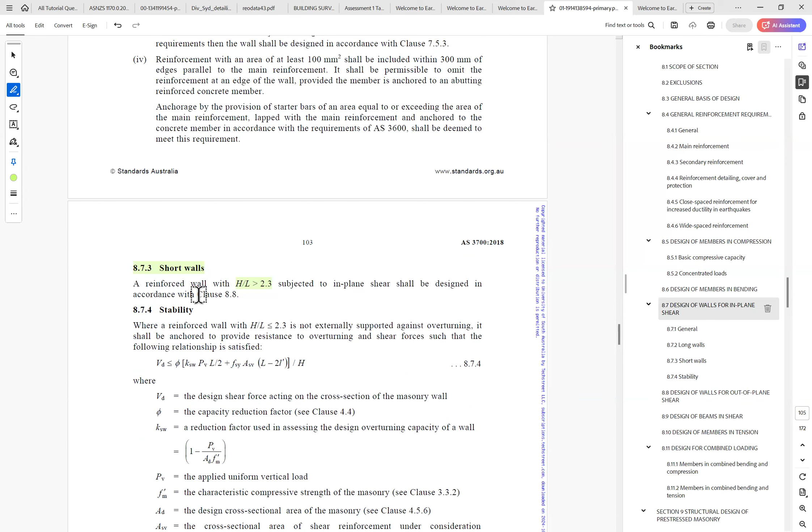If we go to 8.8, we will find that 8.8 is out-of-plane shear. So let's go back to our slides.

So here for long walls, clause 8.7.2. Long walls, when the wall is less than 2.3, H over L less than 2.3. So this is in-plane shear. So we have the formula. Is this our formula?

We have VD, the design shear force, should be less than or equal to phi, the reduction factor, times two components. The first component FVR-AD, which is for the masonry component, and the second component is 0.8 FS yield times AS for the reinforcement component. So for in-plane shear, there is no role for the grout. We have only the masonry component and the reinforcement component, because the grout is very weak in plane shear.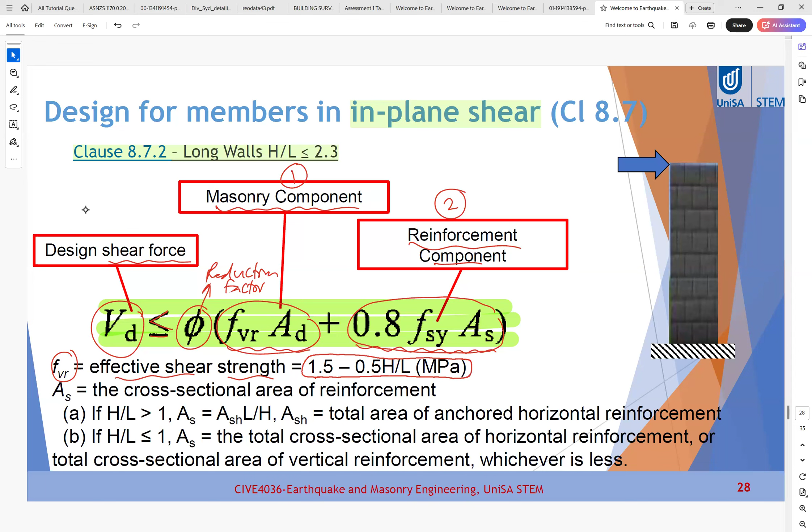FVR is the effective shear strength, which is equal to 1.5 minus 0.5 H over L. AS is the cross-sectional area of reinforcement, with two conditions: if H over L is more than 1, AS equals the horizontal area times L over H. If H over L is less than 1, AS equals the total cross-section area of horizontal reinforcement or the total cross-section area of vertical reinforcement, whichever is less.

Okay, so what does this mean? Just a second.

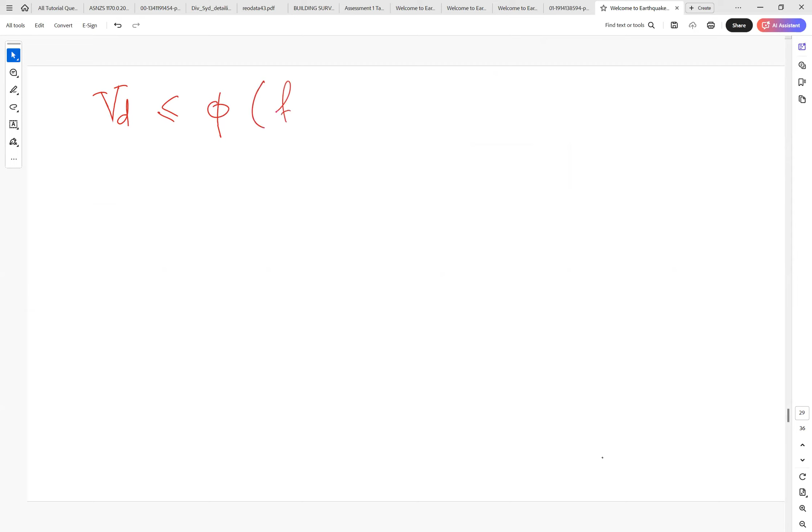So if we add slide here, so for this one we have again VD should be less than or equal to phi times FVR AD plus 0.8 FS yield AS. This is the contribution of masonry, and this is the steel or reinforcement component. And this is our design in-plane shear force.

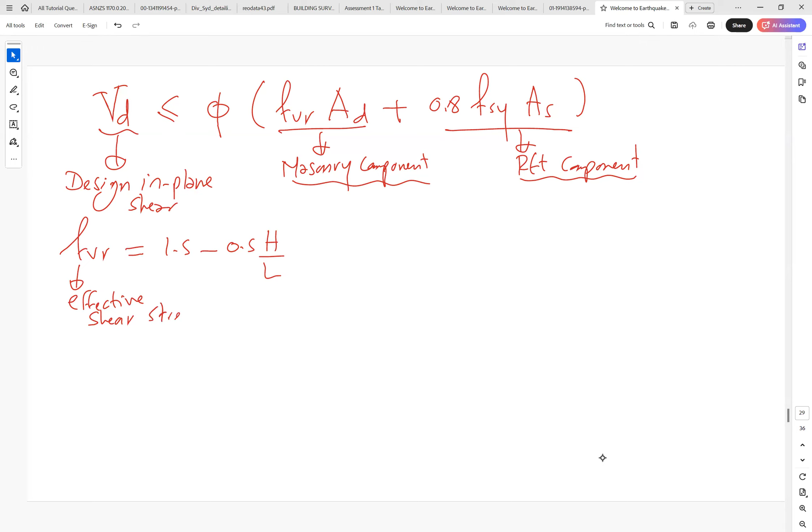So FVR equal to 1.5 minus 0.5 H over L. So FVR is effective shear strength, where H and L, H is the wall height, L is the length. This wall is a long wall, so H over L less than or equal to 2.3. Okay, so this is for FVR.

For AD, AD was defined earlier as... I'm just trying to find it. So AD is the design cross-sectional area for the masonry unit according to clause 4.5.6. So we have this is FVR, AD.

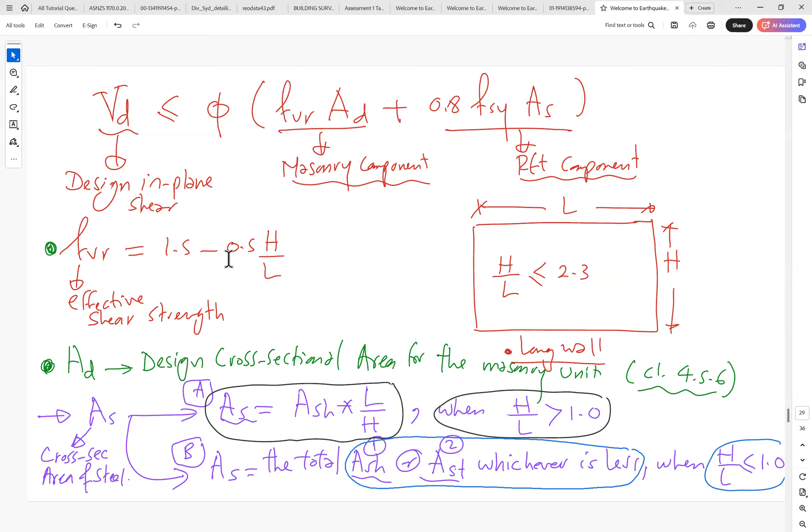Then there is a short example for reinforced masonry. Same example: reinforced masonry wall has length of 2.6, height of 3. So L is 2.6 in this case, H is 3. What is AS? The cross-sectional area of reinforcement, if vertical reinforcement is 4 at 12mm, grade 500.

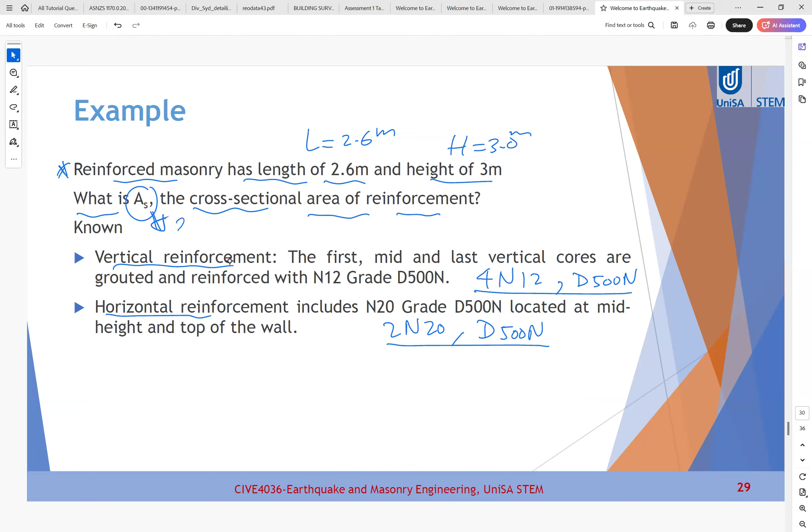Horizontal reinforcement is 2 at 20mm, also D 500N. So it is a continuation on the example we started earlier, but in this step we are finding how much is AS. From our previous calculation, we knew that ASH equal to 2 at 20mm equal to 628.3 millimeter squared. From the given parameters, we have H over L equal to 3 over 2.6, which gives us a value of 1.15, which is more than 1.

So the wall classification is long or short. It is more than 1 and less than 2.3. So if it is less than 2.3, it is a long wall. Okay.

For AS, there are two cases as we mentioned: if H over L is more than 1, or if H over L is less than 1. So we are in the first case. AS equal to AS horizontal times L over H. So AS horizontal is 628.3 millimeter squared, L is 2.6, H is 3. So this gives us a value of AS equal to 544.54 millimeter squared. This is our AS.

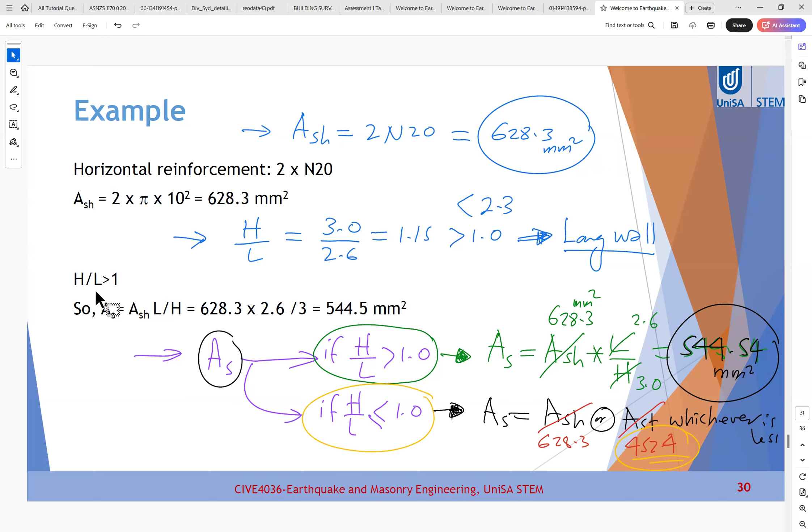Okay, it's just a brief practice, a short practice on the steps. Now, the second case we have is if we have a reinforced masonry member in plane shear but short wall. So if you have H over L more than 2.3, the standard asks us to design this type of wall using clause 8.8 or as out-of-plane shear.

So if you have a short wall, this H and this L, and you find H over L more than 2.3, so this is a short wall.

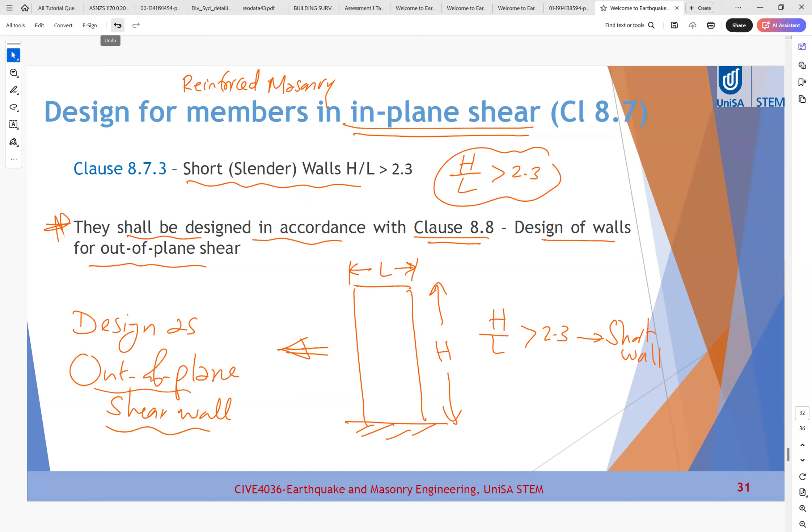So a short wall is designed as out of plane shear wall. If you return back to the standard, the clause we had just read earlier, for short walls when h over L is more than 2.3, it shall be designed according to clause 8.8, which is design of walls for out of plane shear. So it will be designed as out of plane shear.

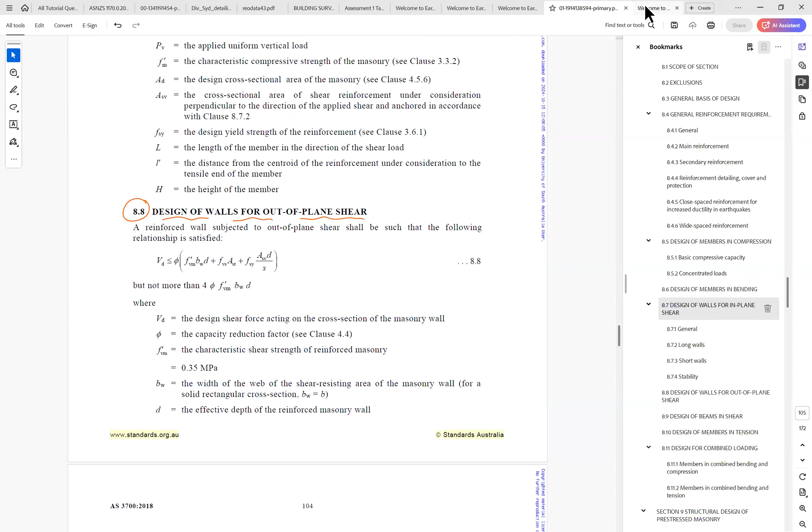So now the fourth straining action or design action we have is design of reinforced masonry member in out of plane shear, according to clause 8.8. We have two cases here, similar to in plane shear walls: short walls, where h over L is less than 2.3, for out of plane shear, meaning loads are perpendicular to the wall; and long walls where h over L is more than 2.3. So clause 8.8 is used in these two conditions.

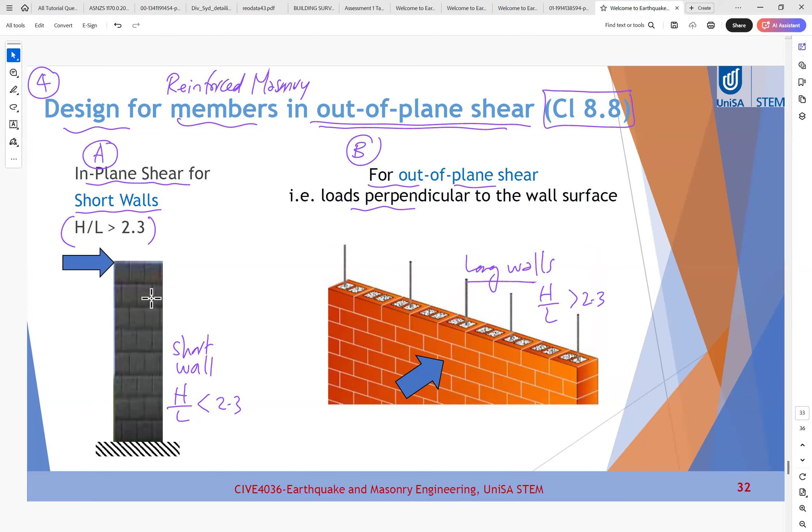The formula for out of plane shear is: VD should be less than or equal to phi. We have three components participating in the out of plane shear capacity. The first one is FVM dash BWD. This is the masonry component.

And we have FVS times AST, the tension steel component. And we have FS yield times ASV times D over S, the shear steel component. So in this case, we have three contributions: number one, number two, number three, from masonry, tension steel, and shear steel.

But there is a condition in the standard that VD should also be less than or equal to 4 phi FVM dash BWD. So these are the conditions we have, where BW is the width of the web, and D is the effective depth of the reinforced masonry.

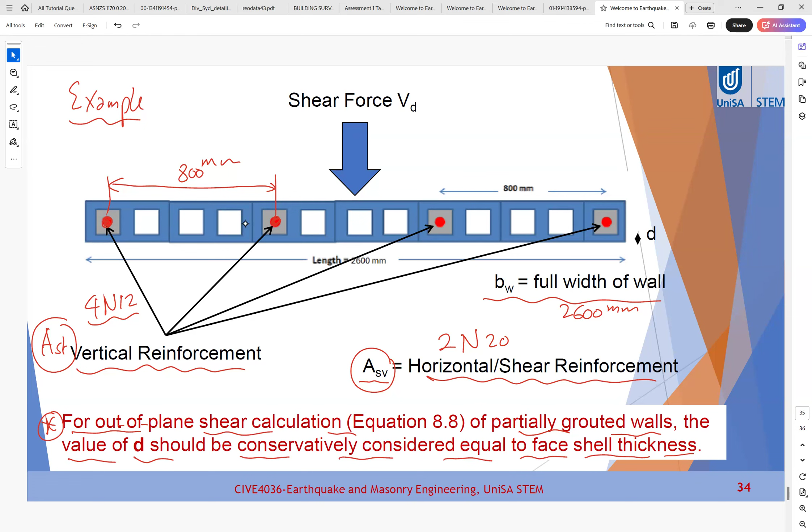D, this is a note here: for out of plane shear calculation of partially grouted wall, the value of D should be conservatively considered equal to the face shell thickness. So in this case only, because the whole wall is not grouted, as you can see here there is no grout. This makes the wall weak at this point.

So that's why there is a condition here to use D as the face shell depth. So in this case we will be using, this is our D. Just because the wall is not fully grouted, it is only grouted when we have the bars, that's why conservatively we reduce D to only the face shell.

For AST, it has also a condition here for out of plane shear. AST in shear is a bit different to the compression case. In compression, it has a different value, it was the minimum of two values, if you remember it was...

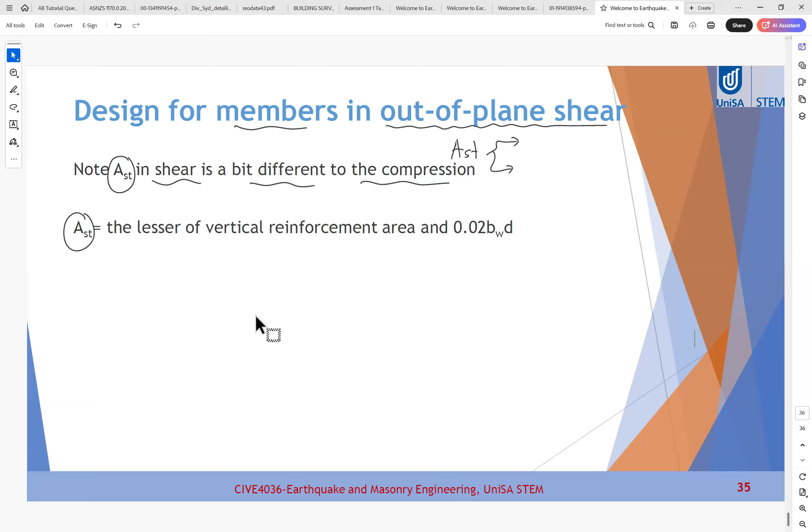So AST in compression, it was should be more than 0.002 AD. This was the condition for compression. But here AST will be the lesser of vertical reinforcement area and 0.02 BWD. So AST in this case would be equal to the lesser of AST and 0.02 BWD, where BW is the wall width, D is the effective depth of the wall.

Okay, I think that's it for today's lecture. Do you have any questions, guys? That's it for the reinforced masonry walls, and if you have any questions just let me know.